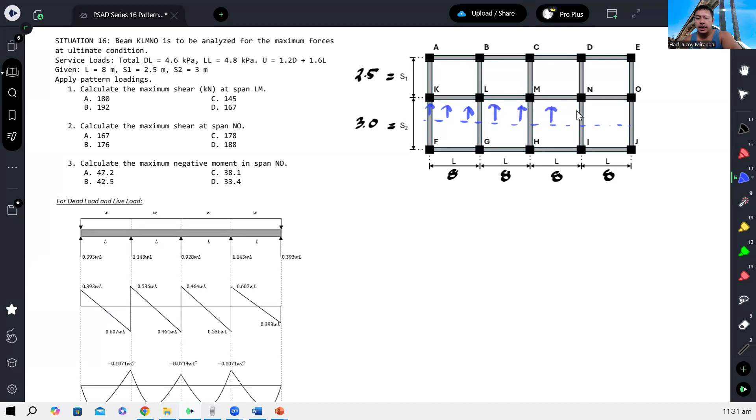Mapupunta lang dyan lahat, so ganyan yung distribution niya, for the slab at the bottom sa top view, and then yung slab sa ibabaw. One-way distribution.

Meaning, para malaman natin kung ano yung load na kakargahin ng beam, kailangan lang natin i-multiply yun doon sa tributary width. Ito yung tributary width.

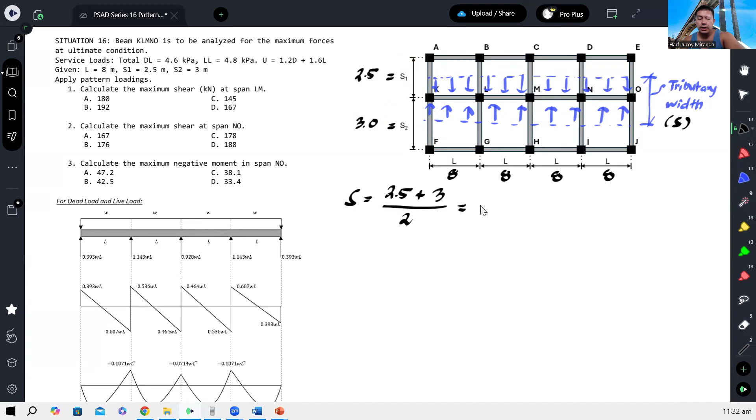For one-way loading or one-way slab, yung tributary width is just half of the shorter dimension. Ibig sabihin, ito half ng S1, ito naman ay half ng S2. So tawagin na lang natin na S, will just be equal to 2.5 plus 3 divided by 2. Pag kinompute natin yan, that's just 2.75 meters.

Yan yung i-multiply natin doon sa mga binigay na loading para ma-convert sila into kilonewton per meter. At saka take note na service load ito, so kailangan pa natin i-factor yung dead load and live load. Alright, so ganito ang gagawin.

Una, what I normally do is I calculate na yung uniform load ng dead load and live load na magkahiwalay. Wag pagsasamahin agad dahil para sa live load, meron tayong iba't ibang loading pattern condition na kailangan i-consider. Kaya mas maganda nakahiwalay yung dead load and live load. So unahin ko muna kumputin yung uniform load.

So yung ultimate uniform load ng dead load, that's gonna be 1.2 kasi gusto ko ultimate na, so factored na, times total dead load na is 4.6, tapos multiply natin nung tributary width na 2.75. This will already give us the value in kilonewton per meter. Kumbaga, ito na yung factored dead load natin. So we have 1.2 times 4.6 times 2.75.

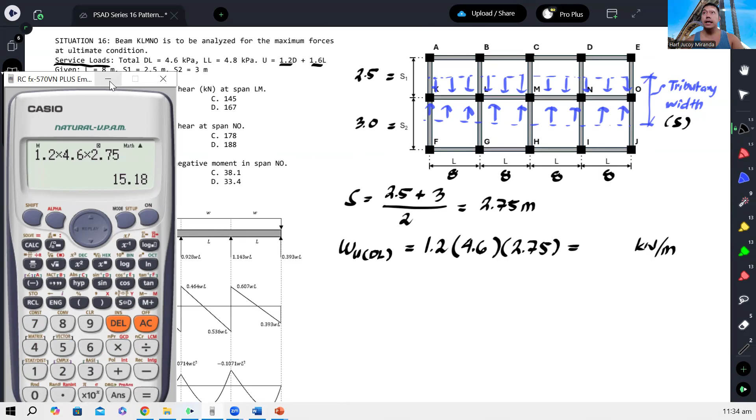So that is already your factored uniformly distributed dead load, 15.18. Okay next, ganon din ang gawin natin para naman sa live load. So 1.6 times 4.8 times tributary width, 1.6 times 4.8 times 2.75. So that gives us 21.12.

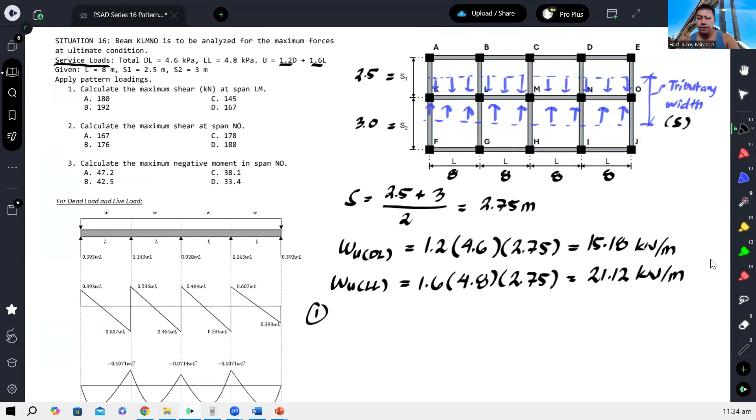Ngayon, kailangan na nating ma-figure out kung anong loading condition ang magpo-produce ng maximum shear sa span LM. Yung span na LM ay ito. Pero ang gawin ko, i-drawing ko lahat. So ito yung number 1. Drawing natin yung buong beam na yan. Titingnan natin siya in the elevation view.

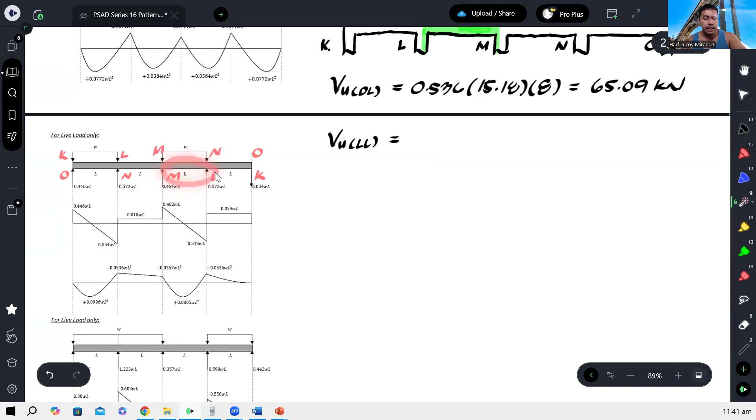Tapos kung dito naman tayo titingin sa kabilang side, ito yung LM natin. Ang maximum naman diyan is 0.518, which is mas maliit pa rin dun sa 0.536. Kaya ibig sabihin, between these two, mas mag-govern pa rin itong buo, yung uniform load.

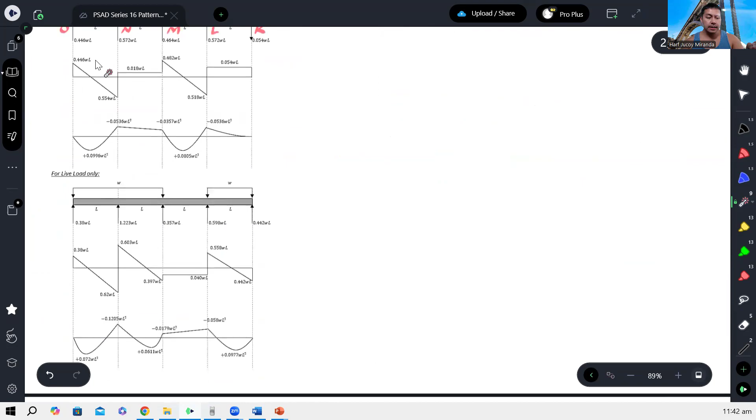Pero hindi pa tapos kasi meron pa tayong third na condition. Para dito, ulit, kung nakatingin sa baba, ito ay K, L, M, N, O. Kung nakatingin ka naman sa likuran, ito naman yung K, L, M, N, O. Dito, by the way, ang pinagkaiba, yung uniform load dito ay hanggang dyan lang, tapos wala sa part na to, and then merong uniform load dito.

So in this case, nasaan yung LM? Kung nakatingin tayo sa ibaba, ito yung LM, so yung mag-govern na shear diagram ay ito. Kung nakatingin naman tayo sa likuran, ito yung LM, ang mag-govern na shear diagram ay ito. Pero mukhang hindi ito yung mag-govern, kasi ang liit to, 0.04.

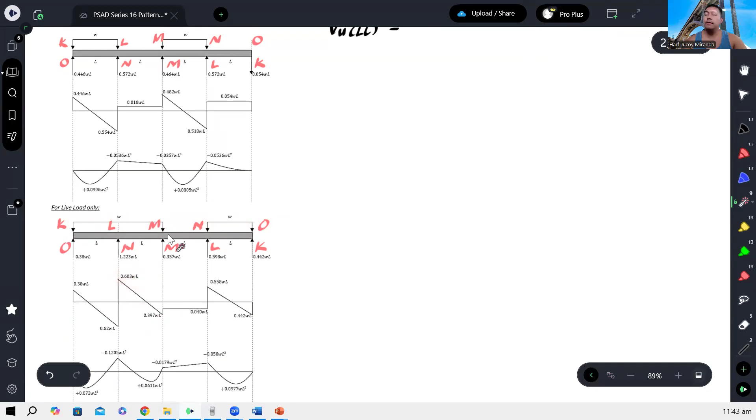So ibig sabihin, kung nakatingin tayo sa ibaba, kumbaga, ito yung pangalan ng mga columns. So ito yung span LM natin. Ibig sabihin, mas malaki itong part na to. Actually, ito yung magiging governing shear for this condition, for span LM. Kung i-compare natin yan dun sa kanina na 0.536, di hamak na mas malaki na to. So ibig sabihin, for live load, ito yung mag-govern na loading condition for shear, for shear in span LM.

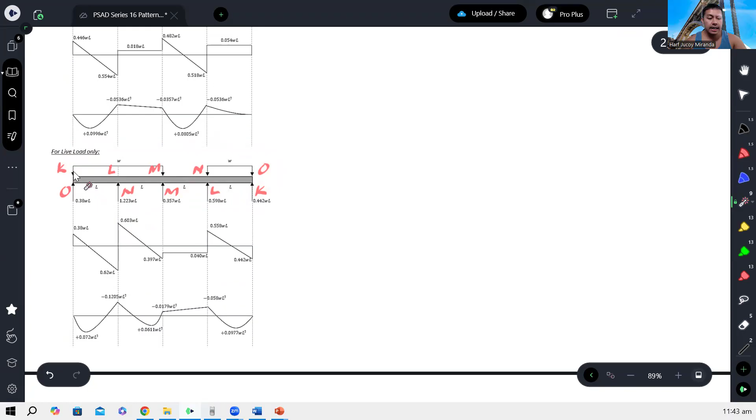Ibig sabihin, kailangan natin lagyan ng live load dun sa KLM, tapos lagyan natin din ng live load sa NO. Ganito siya, maglalagay tayo dito ng live load hanggang dito, tapos another live load para dito. Okay, so this is your WU live load. So yan yung governing condition, at ang governing factor is 0.603 for live load.

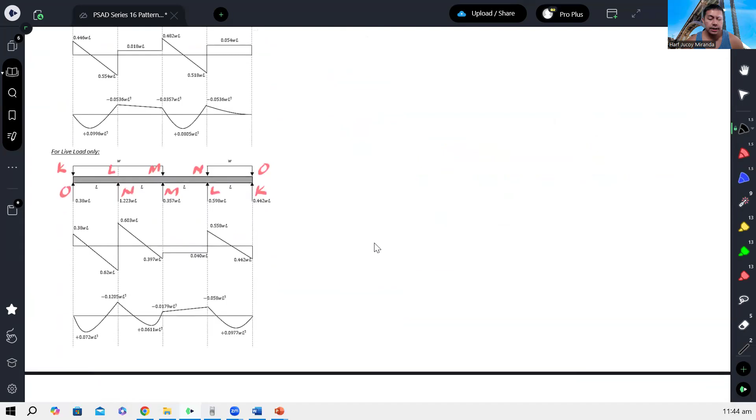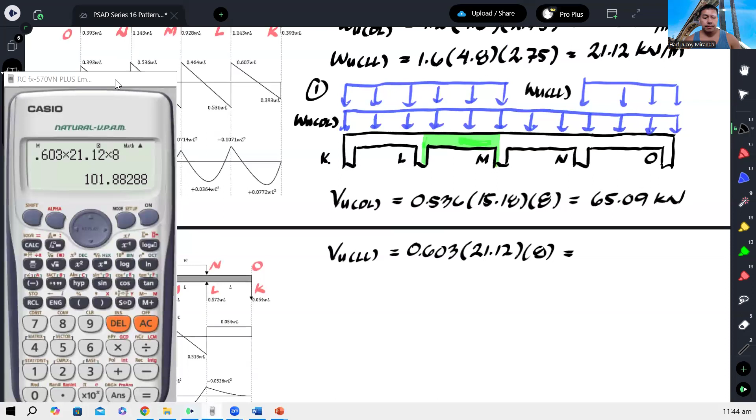0.603, so mumultiply natin ang WL, 21.12, tapos yung L ay 8. So 0.603 times 21.12 times 8, that gives us 101.88 kilonewton. Therefore, our maximum shear for span LM, i-add lang natin yung dalawa, plus 65.09, and that gives me 166.97 kilonewtons. Alright, so for number 1, ang sagot natin ay 167.

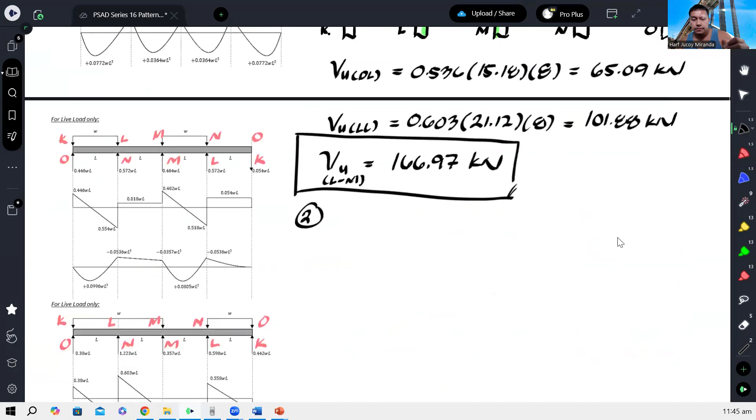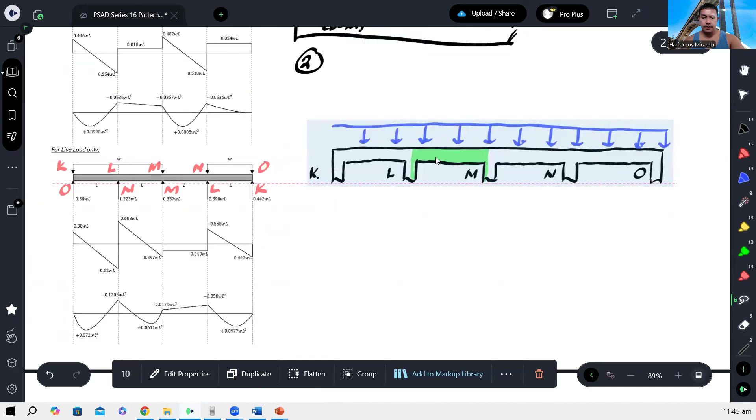Next, number 2, calculate the maximum shear for span NO. So NO naman tayo titingin. Number 2, open ko na lang to. Okay, so once again, burahin natin to. Okay, so this time, ang ina-analyze na natin is NO.

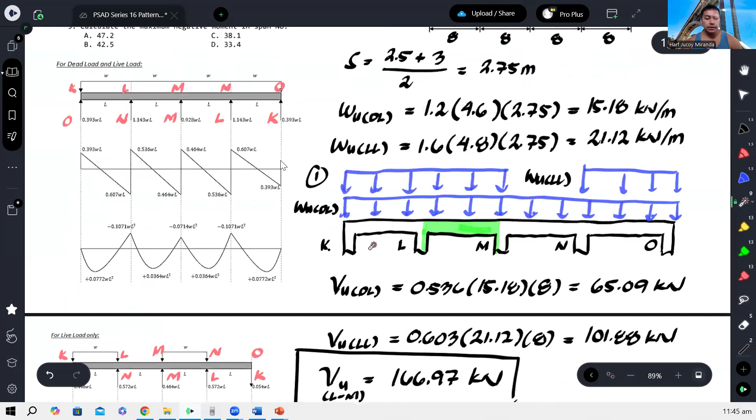Yan na ina-analyze natin. So once again, yung para sa dead load, hindi yun magbabago. Yan pa rin yun, kasi ang dead load naman ay lagi yung naka-apply ng buo. Ang magbabago lang is yung shear. So ngayon, pag tumingin tayo dun sa pattern loading, ang focus na natin is either ito or ito. Kasi kung nakatingin ka sa harap, or galing sa baba, ito yung NO natin. Pero kung nakatingin ka naman galing dun sa likuran, ang NO natin ito. So either of those. Kung titingnan natin, ang maximum shear for this span is 0.607, while for this span, it's also 0.607. Okay, so yan na kagad yung magiging para sa dead load natin.

So VU for dead load is 0.607 of WL. W is 15.18, times L na 8. So kumpitin lang natin. 0.607 times 15.18 times 8, so that is 73.714.

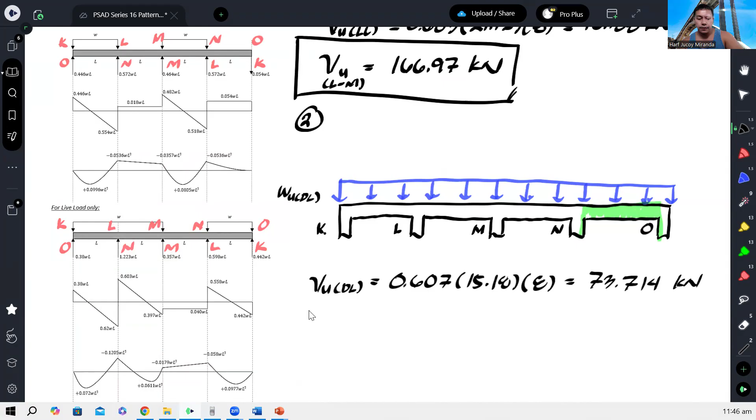Okay, kilonewtons, and then for our live load, check natin. Ang comparison agad, 0.607. Pag dito, ito yung NO, so yung shear dyan, 0.554, hindi, mas maliit. Kung nandito naman yung NO, ang shear lang dyan is 0.054, again mas maliit. Tingin tayo dito, pag dito ka naman nakatingin, so dito muna tayo sa left side, ito yung NO, ang maximum shear is 0.62, mas malaki. So ibig sabihin, ito ngayon yung case na mas malaki.

Pero pag tumingin tayo sa kabilang side, 0.558 lang yung shear diyan. So, ito pa rin yung mag-go-govern. Ibig sabihin, ang condition natin for maximum shear at span NO is kapag meron tayong loading na ganito. Hindi sa KLM, kundi sa MNO, kasi ito yung NO kapag nakatingin ka from the other side.

Ibig sabihin maglalagay tayo ng load sa MNO, tapos walang load sa ML, tapos may load sa KL. So ganito siya, which makes sense, kasi para magkaroon ka ng maximum shear, dapat lagyan mo nga naman ng load yung part na yun.

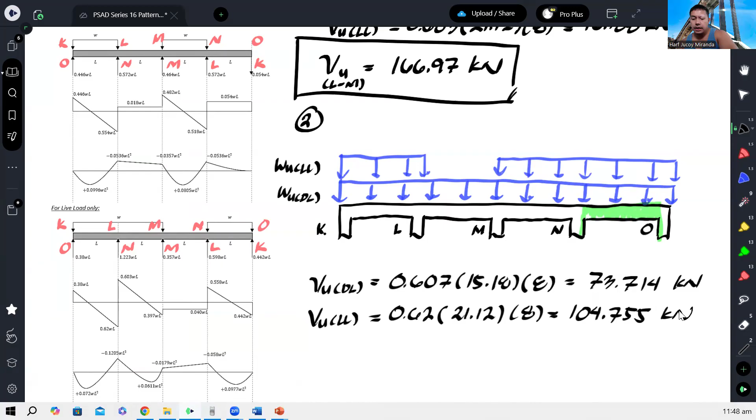Okay, so yan ngayon yung magiging pattern natin for the live load, at yung governing factor natin is 0.62. Yung factored live load natin is 21.12 times 8. So 0.62 times 21.12 times 8, that gives us 104.755 kilonewtons, at pag pinag-add natin yan, ito yung ultimate maximum load for span NO.

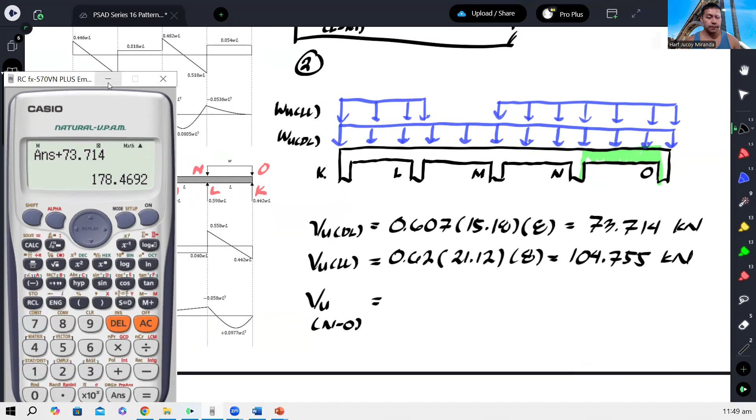So plus 73.714, so 178.47 kilonewtons. Okay, so that would give us letter C.

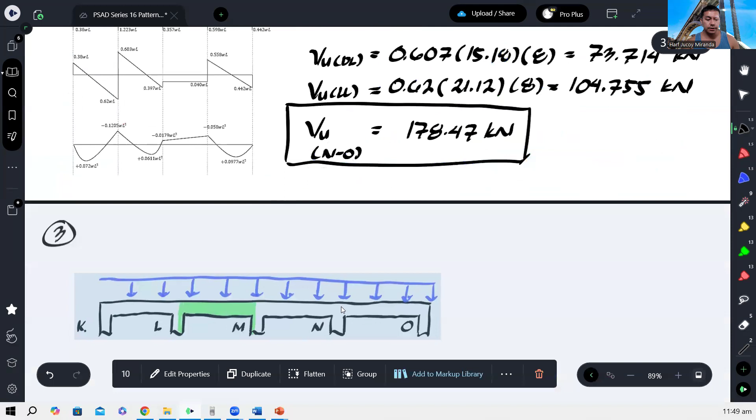Finally, number 3, calculate the maximum negative moment for span NO. So ngayon naman, titingnan natin is yung moment. Kakopyahin ko yung diagram kanina. Ito yun, at kailangan lang natin i-figure out dito kung ano yung maximum na live load pattern. So ang kino-compute natin ay para kay NO.

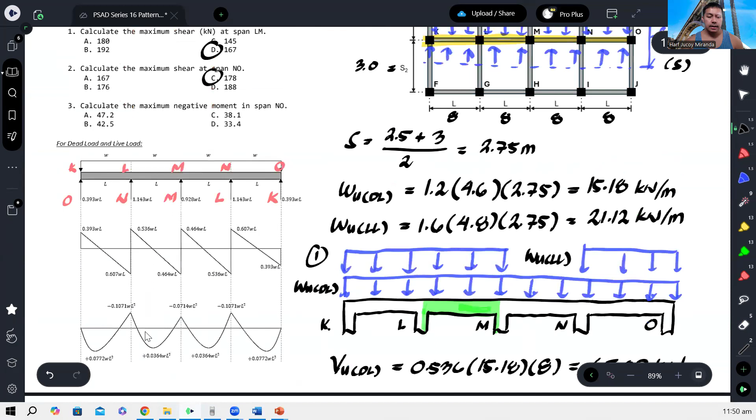Okay, para kay NO. Ito pa rin yung WU para sa dead load. Tapos dito, mafi-figure out na natin yung maximum moment, kasi ito lang naman yung titignan natin. Nasan yung maximum negative? Ang tinatanong, negative. So bali, ito lang yun. Kung dito tayo nakatingin kay LMNO, ito yung maximum negative. Kung dito ka naman nakatingin kay LMNO, ito yung maximum negative pa rin.

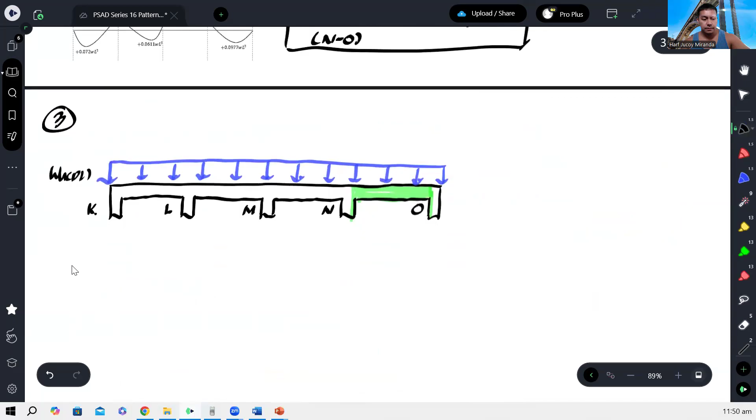So same lang, it's going to be 0.1071 for the dead load. MU for dead load is 0.1071. WL squared, W is 15.18 and then 8 squared. Okay, so that is our maximum moment negative due to that dead load. 8 squared, so that gives us 104.05 kilonewton meter.

Okay, 104.05 kilonewton meter. Okay? And then next, saan natin ilalagay yung live load para mag-produce din tayo ng same maximum negative moment at the same location? So dito yung maximum negative moment, ano? Una, ganun ulit, kung dito mo ilalagay si live load sa lahat, ito pa rin yung mag-govern. Okay, compare natin yan.

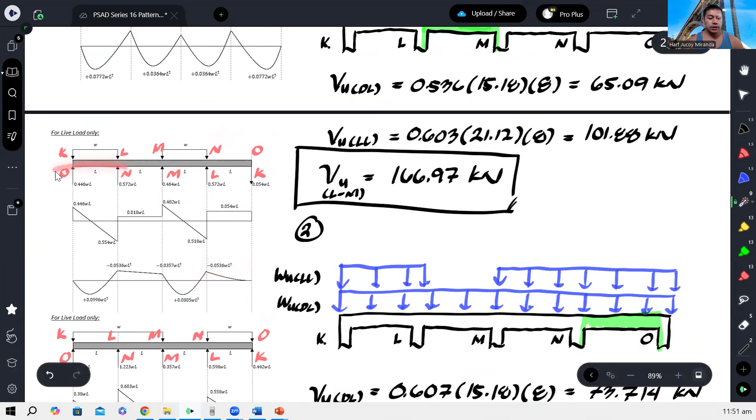What if dito lang natin ilagay yung live load? So ito yung NO, so ito yung maximum negative moment, which is mas mababa. Kapag naman andito yung NO, ito naman yung maximum negative moment, which is again mas mababa. So hindi ito yung mag-govern. Kung dito tayo nakatingin, ang maximum negative natin is 0.058, mas mababa kasi 0.1 yung comparison eh. Pero kung nandito yung NO, ito yung maximum negative moment, which is mas malaki. So ibig sabihin, ito ngayon yung mag-govern, 0.1205.

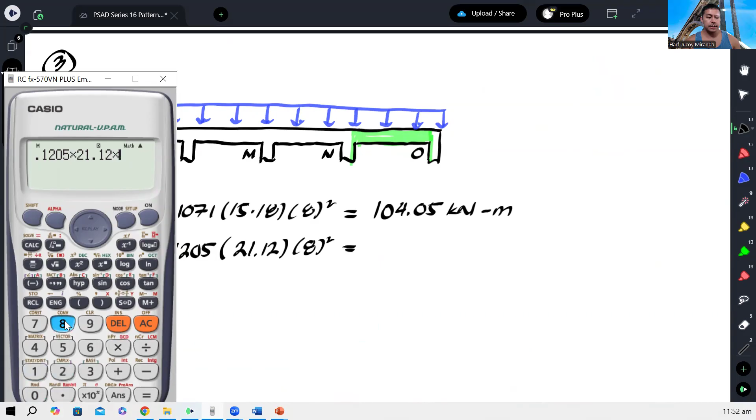MU live load is 0.1205 of 21.12, 8 squared. Okay, so that gives us 0.1205 times 21.12 times 8 squared, and that gives us 162.88 kilonewton meter. Okay? So ibig sabihin, naglagay tayo ng load saan?

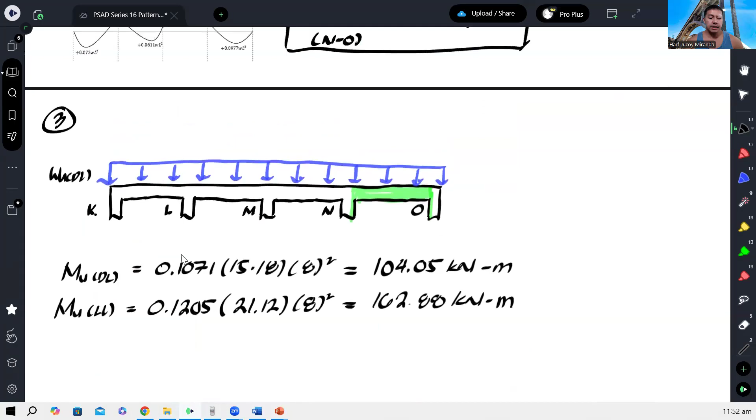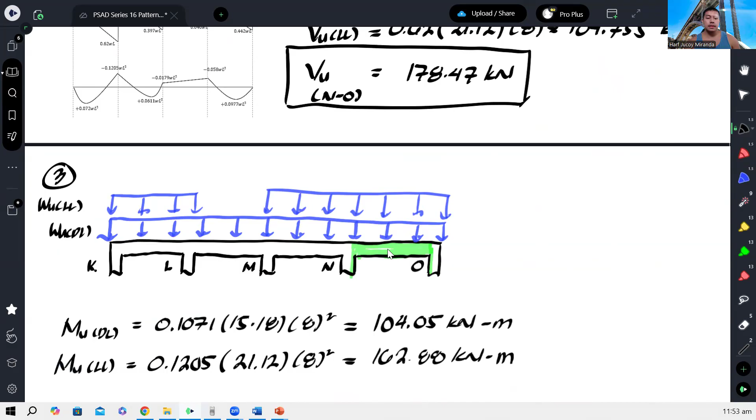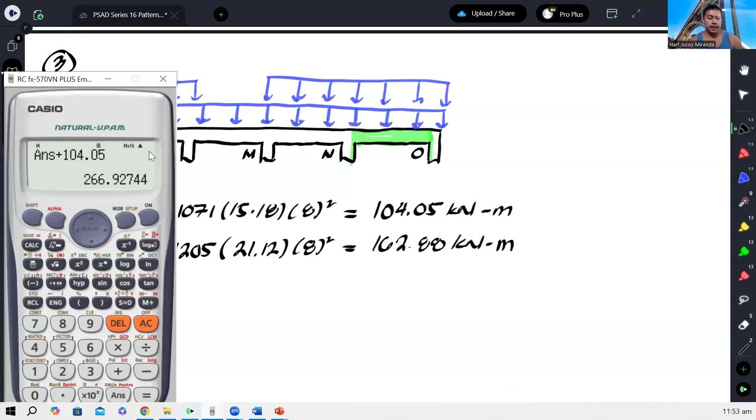Naglagay tayo ng load sa span na ito, sa span MNO. So maglalagay tayo dito ng load, at saka dito, para sa live load. So that will give us the pattern for the maximum moment at span NO. At yung maximum moment natin for span NO, negative, would be plus 104.05. Okay, that gives us 266.93 kilonewton meter, and that should be the answer.